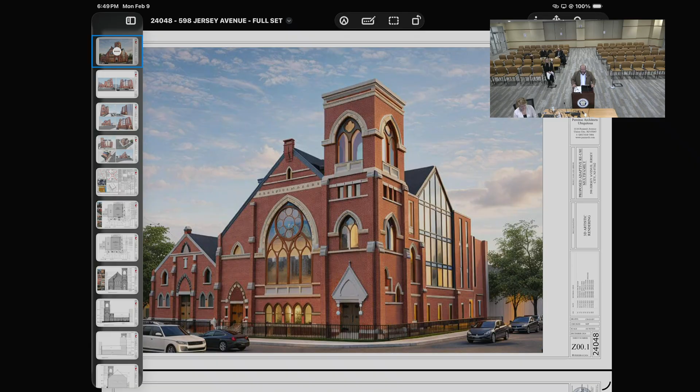Thank you so much. I'd like to begin by thanking you. I really appreciate the dialogue we had previously, and we took it to heart. We've spent this month, almost a month between meetings, refining our design, refining materiality, and working out a lot of the details. Now this is a massive building. There's a lot more I even want to do, but I think we're at a good point where I'm very comfortable presenting it to the board. I don't want to break down and give you the history again, but I can if we need to. I'd like to pick up where we were before and put a few things into the record.

What remains of this site is primarily the Jersey Avenue facade, with only a small portion of the 4th Street facade still present. Our proposal is an adaptive reuse that stabilizes and restores what remains, then reconstructs the lost massing in a way compatible with the original church's scale and vocabulary, while also being clearly of its time. Our preservation approach is guided directly by the Secretary of the Interior Standards for Rehabilitation. We are prioritizing and retaining historic masonry details, documenting and revealing original openings and profiles, removing intrusive modern elements, and repairing historic materials using the gentlest of effective methods.

The drawings include a restoration and salvage mindset throughout. Existing face brick is to be removed by hand, cleaned, cataloged, stored, and reused where reconstruction is required. We are restoring masonry details, sandstone trims, terracotta, and ornamental elements, carefully cleaning, repointing, and repairing with replacement components matching the original design, measurement, color, texture, and finish. Along Jersey Ave, the intent is restoration, clean and point. Along 4th Street, the intent is a contemporary interpretation that respects the original bulk and cadence but uses contemporary materials, including significant glazing, so the new work is compatible but differentiated, consistent with the standards.

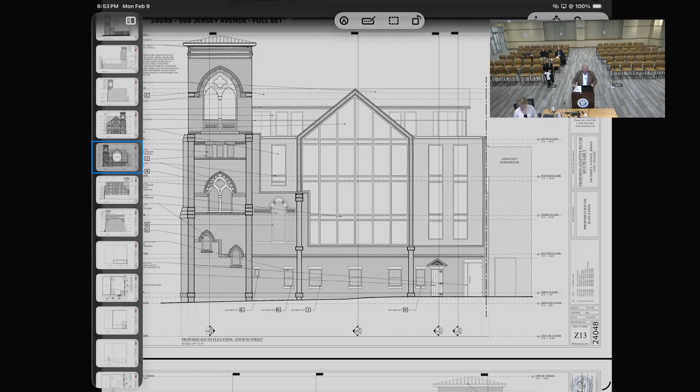I'd like to walk you through a little bit of the very intentional choices that we made on the 4th Street facade. We have created a very almost blunt differentiation between what is new and what is old by introducing a line that literally separates the two. That line is a symbolic gesture of what that differentiation is.

It is created by an ACM panel, 2 inches thick. It protrudes just 2 inches beyond the furthest face of any building element, and it is a blunt kind of reference of this is the separation between new and old.

That is again reintroduced where we're breaking into the existing facade with a new entry point. So we have the same line, same concept along that entry point along the bottom.

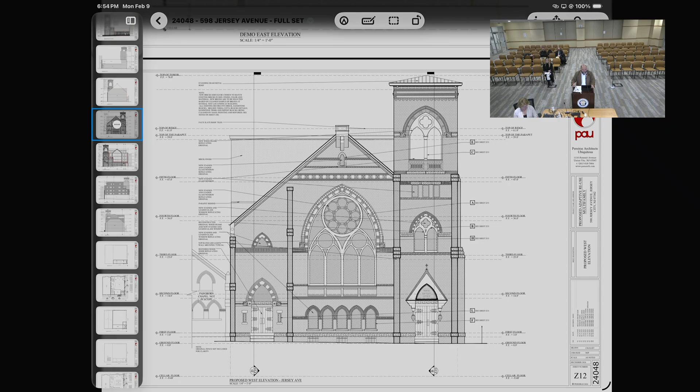As we spoke earlier, our concept and the bulk of the building is still being referenced from the original facade and from the original photographs of 4th Street. We're taking those same elements and following the lines of the buttresses that are existing there, taking the same angle, the same proportion. But now our contemporary resolve is with different materiality.

We're using an ACM panel for that trim work. However, it matches in color, bulk, and scale what was there in the previous facade as well. The infill becomes a glass infill, a contemporary storefront, creating a lightness to the structure. So what we're proposing, what is new, has a different lightness to it.

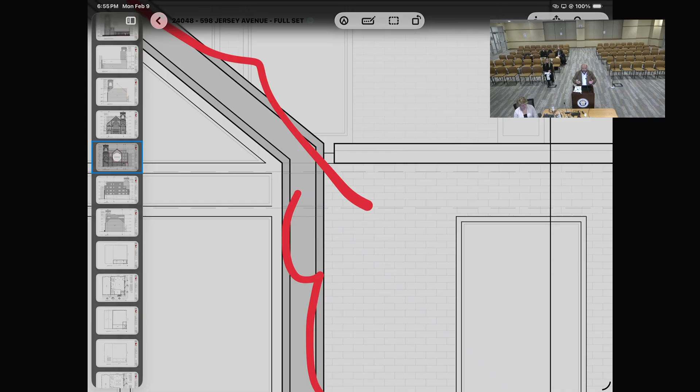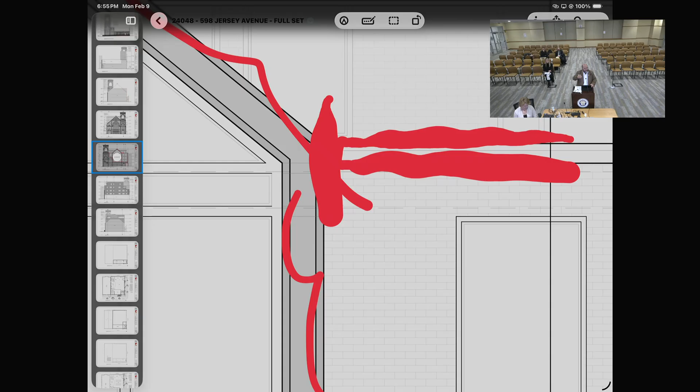And then there are a lot of poetics within this. For example, just to mention one: the cornice on top of the historic construction was cast stone placed on top with also bent metal. We are using the same kind of decorative element, but we leave a space between the top of the cornice and the next element to show this is no longer being used as a form of keeping water out. This is a very intentional design element to show how our facade, our envelope, is being wrapped underneath with modern building materials so that we see that differentiation.

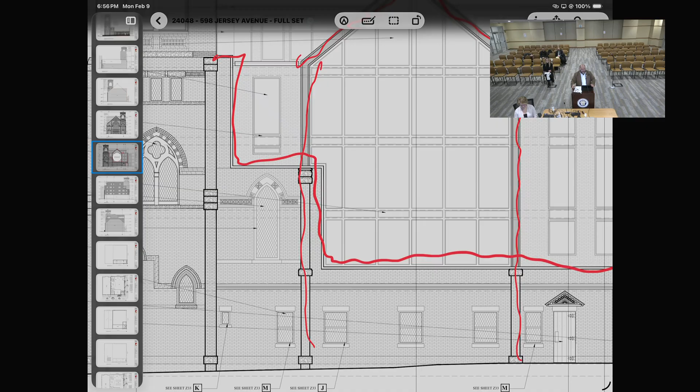There are also very intentional elements done within our facade. For example, it is not our place to define where the difference is between historic and the proposed building—that is a pre-existing spot. So for example, this spot right here, that is a very awkward line. That is awkward intentionally, because now it shows that on the bottom and left of this is the historic facade, and to the right and up is the proposed new contemporary facade.

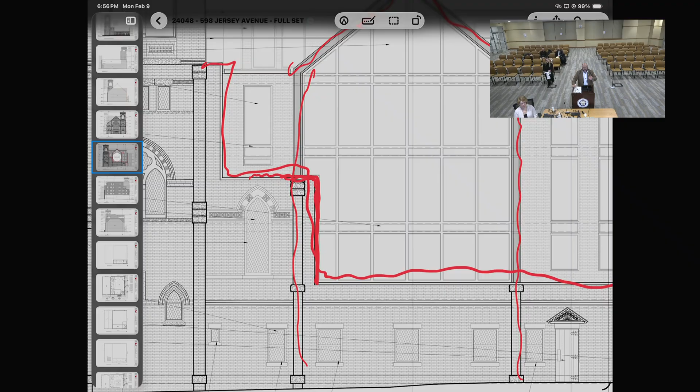And that awkwardness in the facade, not keeping it perfectly symmetrical, makes your eye go to that and question: what is this, why is this, how does this work? And it makes you understand really what that differentiation is, and in a very subtle way exposes the difference between historic and the new building.

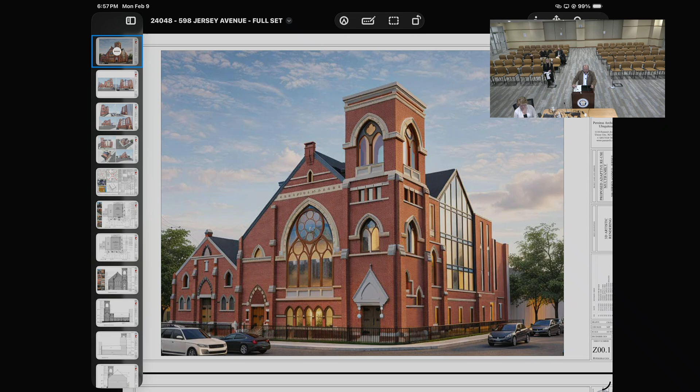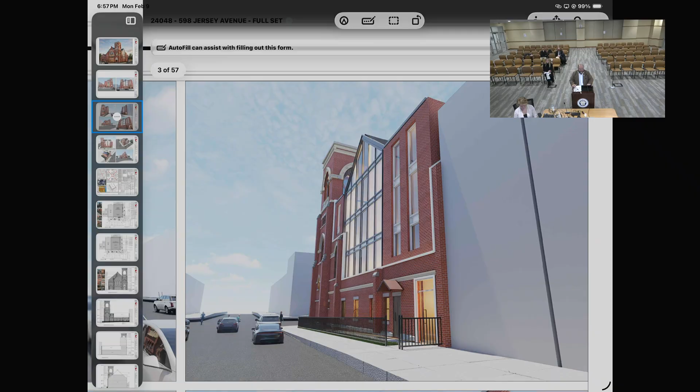We also took into account a lot of your comments and wanted to understand how the bulk of this building is visible from the street level. We created a very accurate model and took shots from every angle so we could understand what that massing and that building feels like from different perspectives across the site and across the street, so we understand how the building reads very much in scale with the rest of the neighborhood, and how the upper floors are set back in a way that is not intrusive.

When you're walking on Jersey Ave, the portions to the back are secondary to the Jersey Ave facade. They are stepped back sufficiently that it does not take away or hinder from the historic facade.

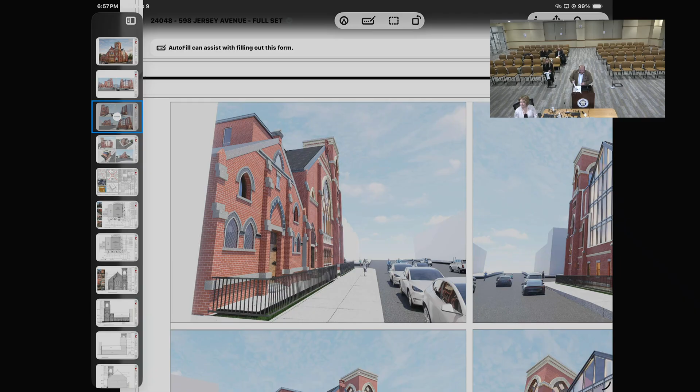And I'd like to, Commissioners, on the 4th Street facade, just talk a little bit more about that and compare it to the standards.

It is intentionally contemporary because the project is being guided by the Secretary of Interior Standards for Rehabilitation. Those standards do not ask us to recreate history where it no longer exists. They ask us to preserve what is authentic, avoid conjecture, and make the new work compatible but legible as new.

If we go standard by standard, Standard 3 is most central here. Most of the church volume was lost after the fire and decades of deterioration, and a literal replica along 4th Street would risk creating a false sense of historic development. Our approach restores the surviving historic fabric on Jersey Avenue where evidence and material remain, and treats 4th Street as new construction that is honest and respectful rather than pretend original.

Standard 9 then guides the design of the new facade. It requires that the new work be compatible with the historic building in massing, scale, and rhythm, while also being differentiated from historic fabric. Along 4th Street, we match the historic bulk and vertical cadence, and carry forward recognizable church vocabulary, including a brick expression and a roof character that reads consistent at the streetscape level. At the same time, we intentionally introduce contemporary elements and architectural tricks, including substantial glazing and details, so the addition reads clearly as new work and of its time.

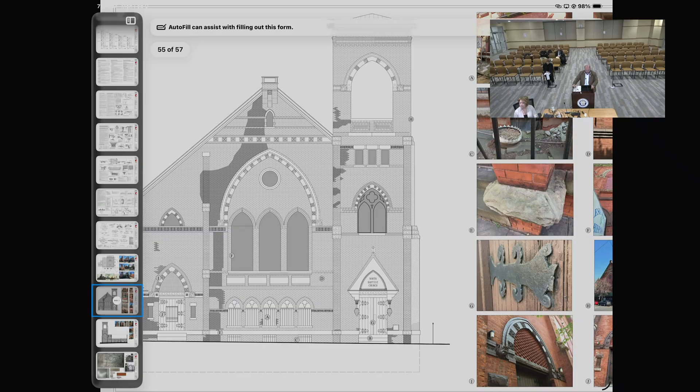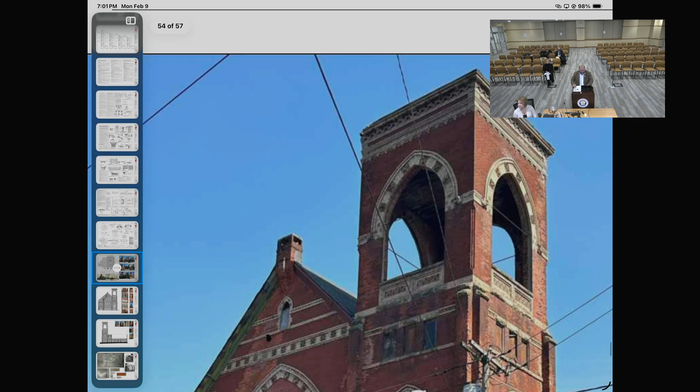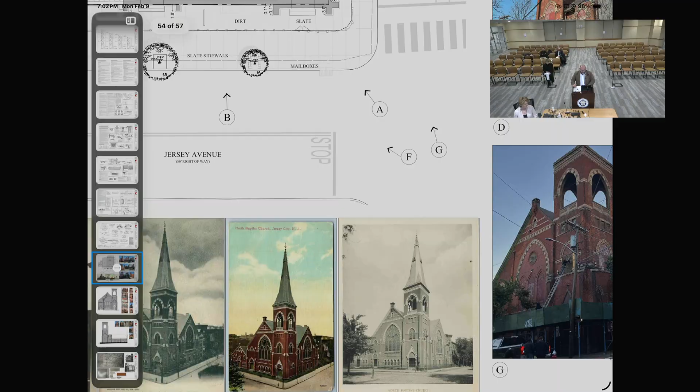This is what is currently there right now—we have a photograph of that condition, a somewhat recent photograph, about a year old. That's what's there now. What was historically there was the steeple. We are keeping that last element, that band, and creating a roof that disappears behind it with a low pitch, the minimum pitch we could comply with code, so that it disappears—that's our proposal. I think it might have just been the rendering.

It will be concealed. The new roof will be fully below that line. Yes, it's fully below that line. And that new roof is still a pyramid? Correct, it's still a pyramid, and that's the easiest way we could keep it out of sight lines from every angle.

So I know you've changed the roof line of that addition portion—this shows it well on the bottom left there. You flattened that out from what was previously this sloping roof. Can you talk about some of the other things that have changed, or if anything else has changed with the massing since we last saw it in December? Very little of the massing has changed other than that.

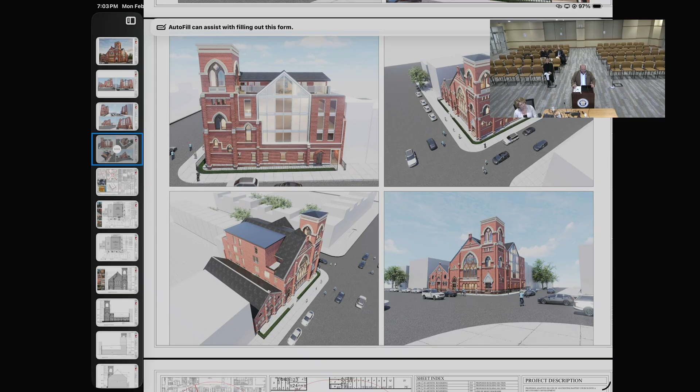I thought that was a great point brought up by the board. I thought the slope roof was attracting attention when our intention was for it to fade away. Now I think it really does become a secondary effect. The only other aspect of the massing refined significantly is what happens in this corner over here. As the roof slopes down, we stepped it. We thought it was important because this roof was visible from the street, so we kept that roof line coming all the way down.

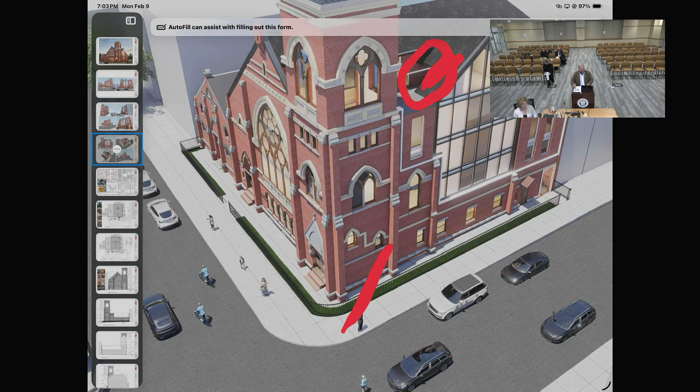And then we cut it out in the back so we could bring light into the spaces. That's the only difference from the original drawings as far as the bulk dimensions, but there's been a lot of refinement, like the opening at the entryway being a little larger and redefined. We introduced a lot more glass within the portions of that strong gable, but as far as the bulk envelope, it remains the same.

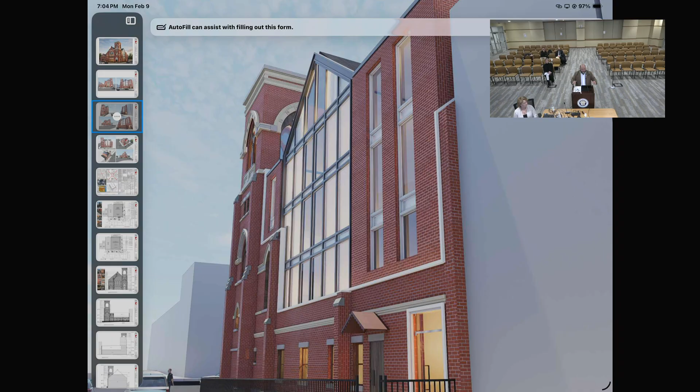I have a question on the elevation. Part of the set mentions new stained and leaded glass windows, and I think some of that is pointing to this large glazed area here. Is that accurate? Are some of these going to have a stained or leaded finish, or is this going to be clear glazing? It's kind of rendered so I don't know if that's supposed to be shades behind it.

This was a point of contention between Mr. Reedon and I, and we've talked a lot about it, probably 30 meetings on these different aspects. Our intention is that on the contemporary facade there will be no more stained glass, no more diamond plate. The stained glass is going to be limited only to the historic portions, not the contemporary portion.

I think that makes sense. Keeping it consistent - historic versus contemporary, having the contemporary be clear glass makes sense. And then are those spandrel panels at the floor levels, in between the windows, that way as well?

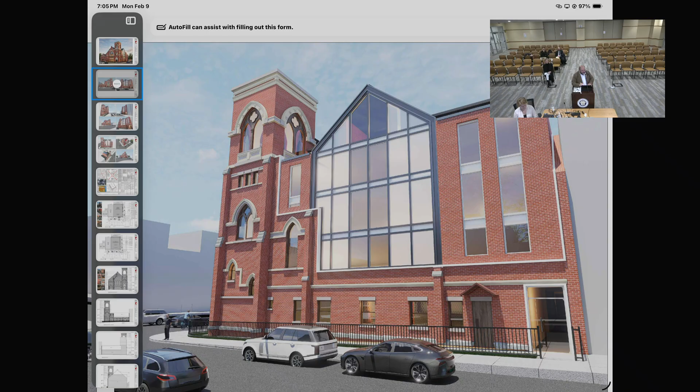There are two types of glazing in that large format. It's a little hard to tell from the rendering, but I'll highlight this area - it's all spandrel glass in between. The clear glass is in the center with only 20% reflectivity so it reads somewhat close to one unified piece.

What is the difference between the area in the middle and the areas to the left and right, which are rendered whiter? Those are opaque - you can't see through them - and the center portion is the more clear area. Please just explain the difference.

Is there a reason they're opaque? Because it's part of the design. We had lots of walls intersecting there, and we wanted to keep the symmetry of the facade. I thought that was important, so that's why we chose to make them opaque. Okay, thank you.

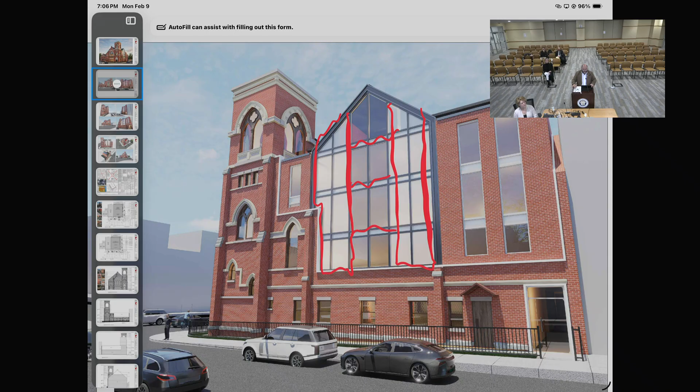I have a couple other questions about the Jersey Ave facade. In this rendering at the corner entrance there's pedimented stonework above the doors, and in the photos of the existing condition they appear to be a brownstone, but in the rendering they're gray. I want to know if that's a rendering issue or if there's an intent to paint or coat the stonework. No, it's a rendering issue.

And same with the four recessed brick panels? Yeah, same thing. Okay, just checking, thanks. We had very tight time constraints.

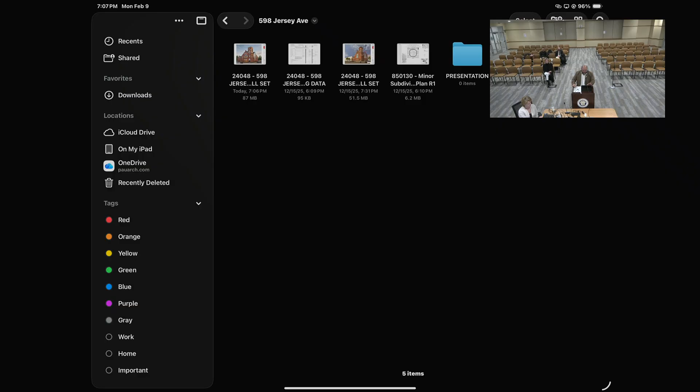On the 4th Street facade, do you still have the renderings you presented at the last meeting? Could you put them side by side? I can. I can't quite do them side by side, but this is the original rendering - literally the one I was presenting with and sketching on at the last meeting.

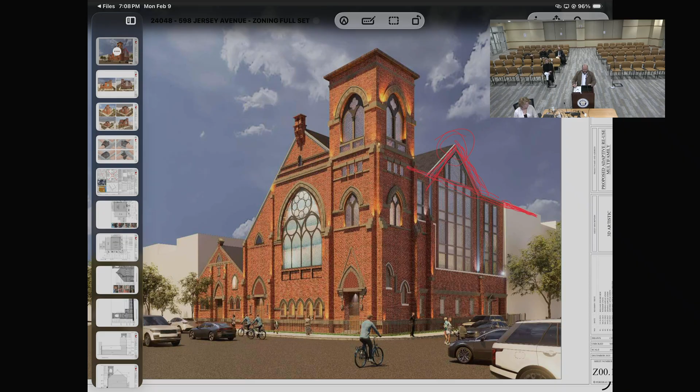We basically started the model from scratch based on our latest scans and new drawings, so things are a little more precise now. This is the old one, and this is the new one - I think that's a way to have them side by side.

Yeah, I haven't been able to get- oh, thank you. Duh, okay. There we go.

A lot of detail has been refined too. If you notice, the thickness of the windows has been increased because our fabricator was unable to match the thinness we originally designed. However, this looks more in line with the historic character of the original windows, so that has been refined significantly.

I wanted to follow up on the two facades. In your presentation, you said that for the brick portion of the 4th Street facade, which you're creating as a modern area, you're matching the brick to what is existing on the rest of the building, right? Correct. Tell me why you made that choice, why you didn't just go completely modern on the infill portions you were creating.

We wanted to maintain a continuity of character. Even though we are being contemporary, we wanted consistency in the materiality and the color. The brick is constructed in a very different way though - our brick on the contemporary portion is a brick veneer, full-size brick, but built in a contemporary way that lets us accentuate where we have windows and different building elements. So even though it's the same materiality, it's used and built in a new contemporary manner.